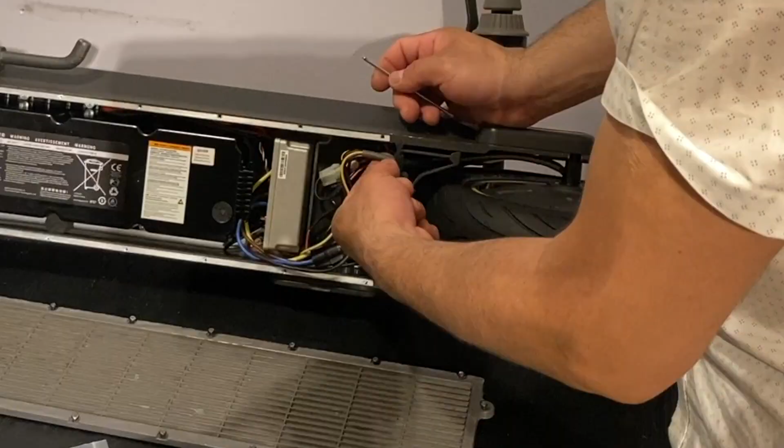So next step, this usually comes tied up. We're not gonna touch anything else, we're not gonna plug anything from here, nothing from here, so we're gonna avoid that step. This is a seal to protect from water coming into the chamber of the battery and the controller and electronics. So what we're gonna do is just push it out, push it in a little bit more, something like that.

Try not to let the wires touch the corners because they're very sharp. I want to make sure it is protected properly, because that could do damages. This is very important for you guys to do it properly. Remember that everything is connected, so you don't want to have any inconveniences due to it.

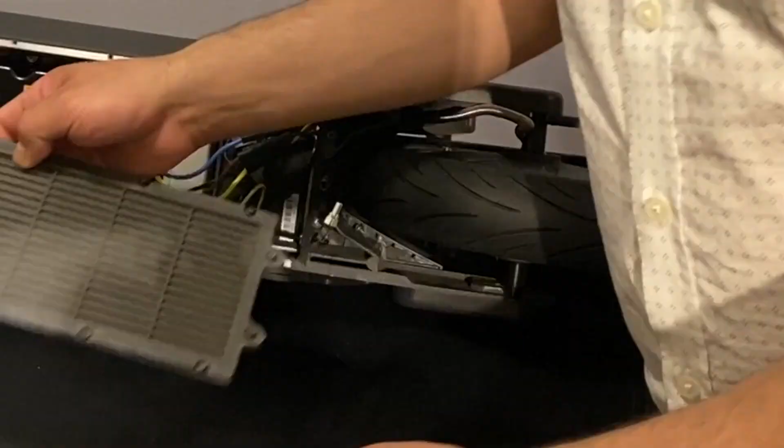So the next step is going to be remove the screws from there, as I was saying earlier. So we need this heat gun over there. Now we have that loose, that's it, so we got this out. What I'm going to do is just put it on the side, right there.

I'm gonna bring the scooter back to position, standing position.

So we're gonna start from the front. We have screw number 1, and number 2 is right there. What we're gonna do is leave it all the way until there. Now we're gonna grab our Allen key that is 2.5 millimeters, and we're gonna start removing those screws out.

We don't want to pull them out fully. Again, if you leave the screws in place, you don't have to worry about mixing them up later on. We're gonna try to keep them inside the same parts that we're gonna remove, because they're gonna have to come back to the same place anyways.

As we can see, the screws are gonna be right there, they're gonna stay right there. So what we do is just gentle, put it like that, and then we can put out the fork aside, and we know that the screws are gonna stay inside, they're not gonna fall off. Start removing.

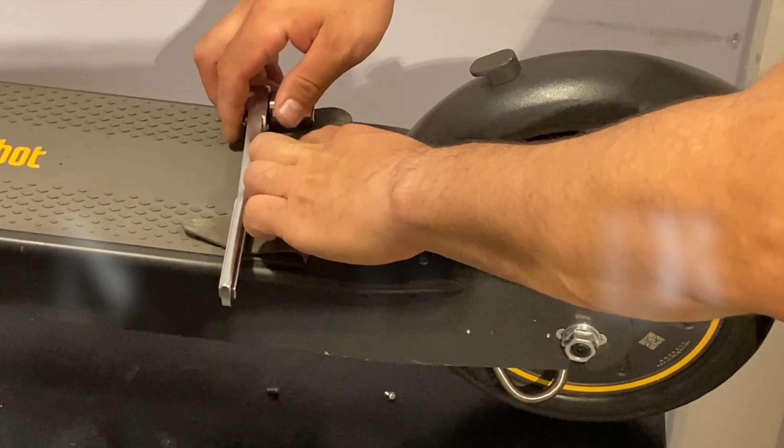Again, to keep the screws in place, use your hair dryer or heat gun just in this area. So this, when you lift it up, becomes clean and it's able to do right there. Now this one will be Torx number 15, the same one that unlocks underneath.

So now, as we can see, we removed those 4 screws. Over here are the ones that they're connected to, 1, 2, 3, and 4, that we removed already from underneath.

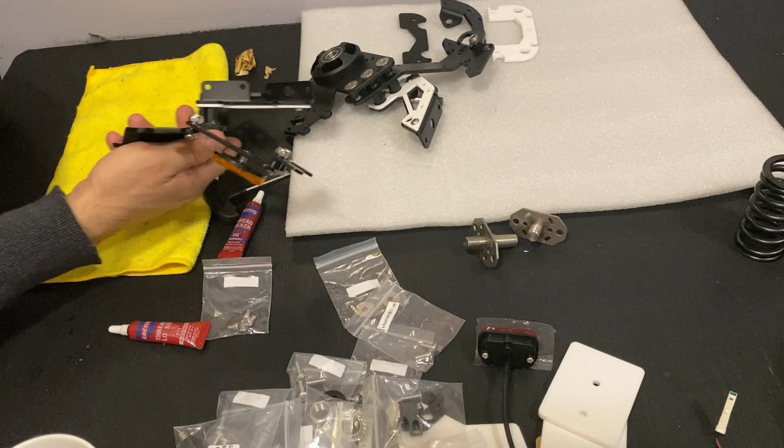Okay, let's begin with this. We're going to proceed to remove the protective shield that is placed for the acrylic. It's like a paper or plastic. So we're going to have to unassemble these parts.

Before you actually start unassembling the parts, it's best for you to take a picture of the part so you actually remember exactly how to put it back after being clean.

Do one part at a time, keep your screws together so it's easy for you to put them back. And remember to use thread locker in your screws that you know you're not going to be removing again. Use blue thread locker in case they need to be removed at some point.

And remember to do one at a time so you don't make a mistake later on, because it's a lot of parts and you might be having a headache trying to put things back together.

Put your screws in and tighten them up fully because these are not going to be removed anymore once you put it back in the part that it needs to be.

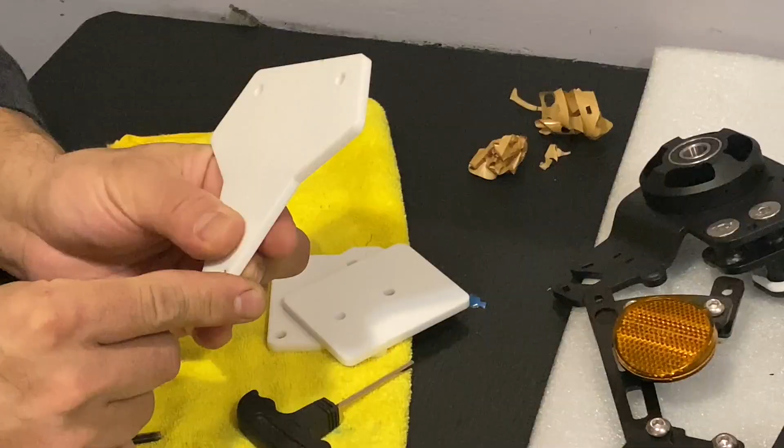Let's continue to remove the protective shield from the acrylic parts. As you can see on the whites, they have that plastic that over time looks damaged, so it's best to remove it at once.

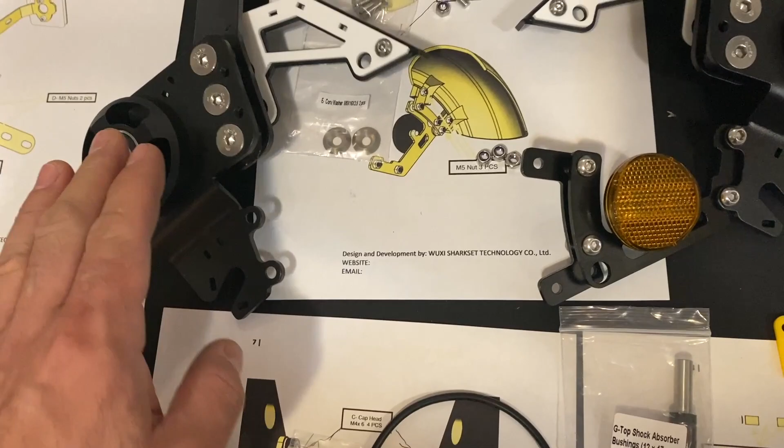Again, so simple: follow the instructions in the manuals, and put your parts separate so it's easier for you to do the installation later on. It's very important to follow what I'm doing, because otherwise you might end up undoing parts, and we don't want that. So we're gonna do it all at once.

Since we're in the process of installing the suspension, I want to show you a couple of things that are key and important to understand. As we know, the Sharkset rear suspension comes with two springs: one for 100 kilograms and less, which comes pre-installed, and another for 100 kilograms and above.

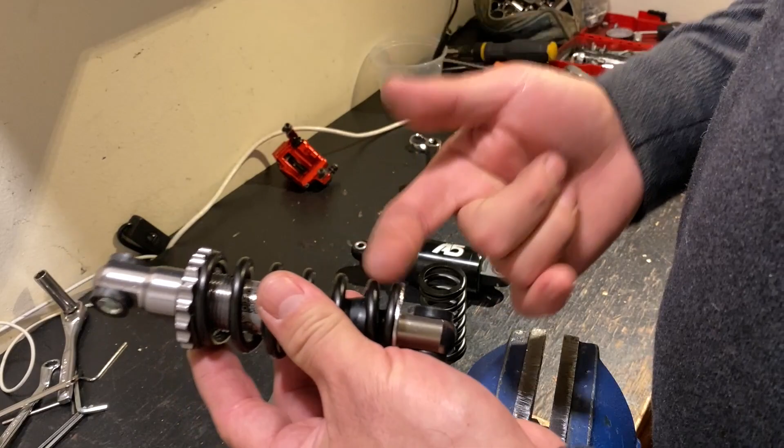There are two ways to change this. I'm going to show you the one I like, because I know from experience that when I remove that screw from here, it always becomes loose, so we don't want to mess with that part. We want to do it the other way, which is simple - all you need is a few screws, some parts like this, and sockets.

Let's begin. As we can see over here, you loosen this completely in case you want to do this part. Push this up, put this rubber up, and then you get to this one.

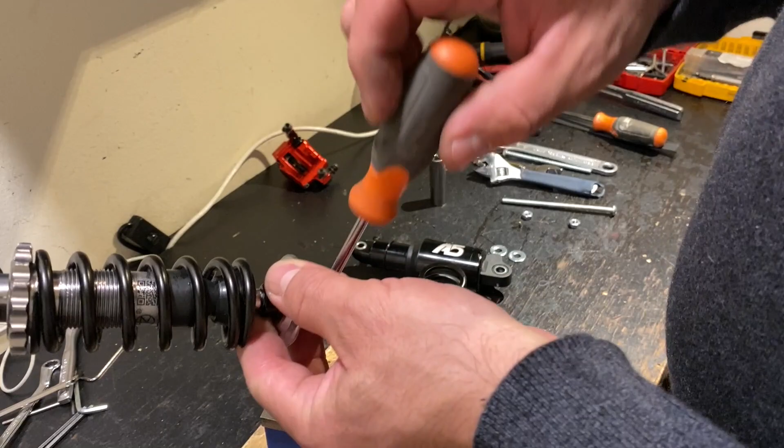The way you'd normally do it is grab a screwdriver, but that's another part I don't like, because once you put the screwdriver here, you put a lot of force on this part, and the cylinder could become bent.

Let's proceed the other way, the way I like to do it. First thing, I'm going to remove the bushings. As we can see, these are very simple to do.

So here we go. As you can see, this thing doesn't come out easily. You don't want to hammer it, and you don't want to put it in the vise, because the jaws of the vise are very rough and that will ruin the cylinder.

So what you're gonna do to start is put in the bigger bolt. I don't have a smaller one on hand, otherwise I would show you how to do it that way.

Look at this, it's very simple. So we have it right there already. Our next step is to hold it on one end right here, so this doesn't turn.

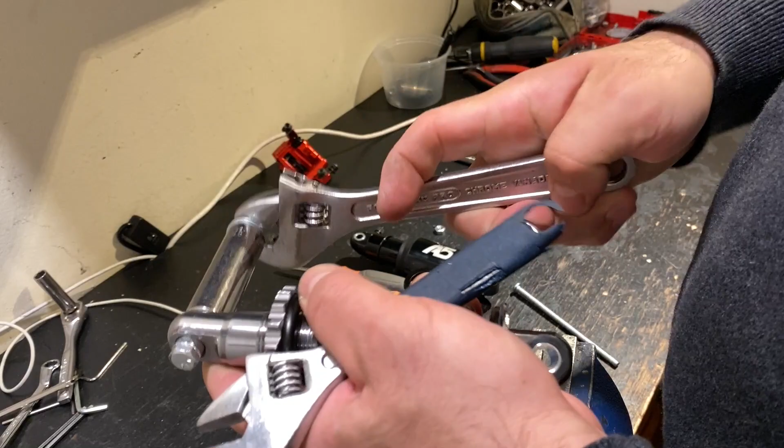Then we go to the other side. Once it's a little tight in there, that thing will not move - see? So all we need to do is just keep turning. You can see I'm at the limit already, so this bolt over here doesn't go in.

So we're gonna use the other bolt. As you can see, it's almost out. So we go back to square one, put that back in, same nut.

So look, once that is tight, it comes out. Can we see? We got it fully out, the cylinder, without having to hammer it or anything. This thing is like nothing happened.

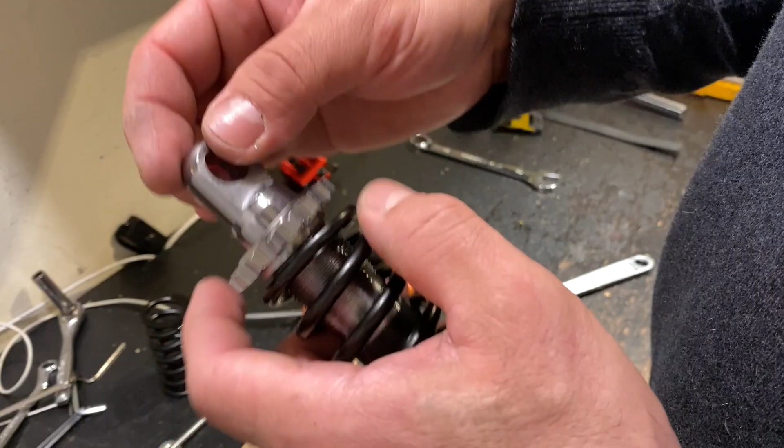So now when you have done that, simply remove completely this part. See, you get out the nut, get the spring out, put the bigger one in. Anyways, I want to keep the same small one. Just remember that this thread over here is the one that is going to go down. Anyhow, so that's the way to remove it.

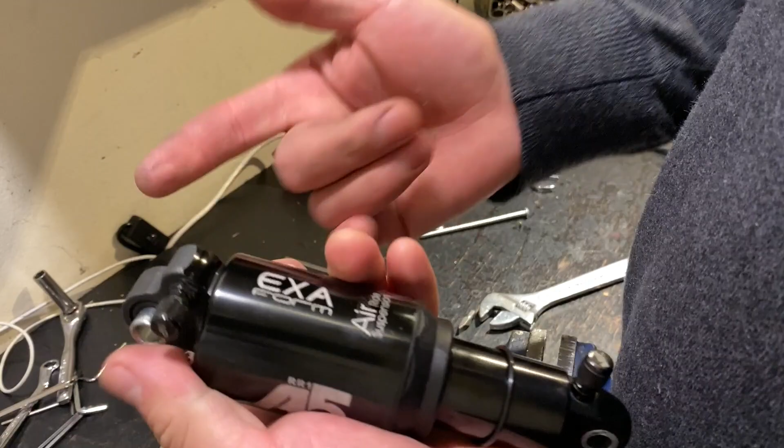Okay, so now I'm going to show you how to remove this one, and this one should be easy to remove. As you can see, you just remove the old one. You're not going to remove the plastic, just this one, and you simply put this one in, the one that it came from there. Put the bushings on the sides like this, put the other one, and then you're ready to replace this one.

So remember, this is 150 millimeters, so you'll be looking to install the same dimensions. It's 150 millimeters from eye to eye. Anyway, so that is done. So that's how you replace the cylinder.

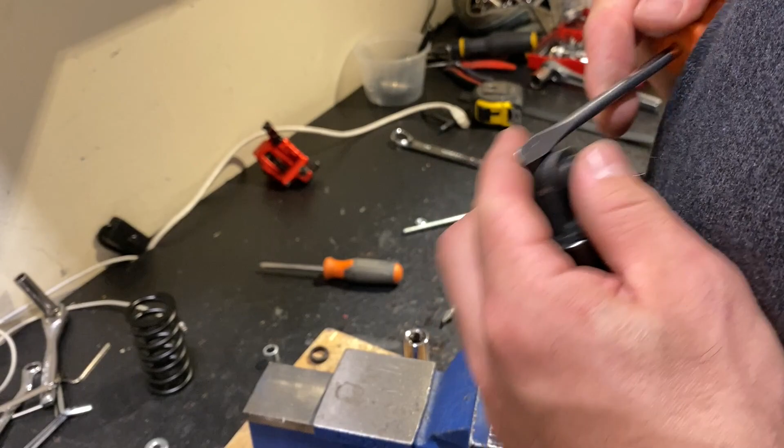If you get air shocks, new ones, then you don't need to do this, because it will fit just perfectly going to this, from this to that one.

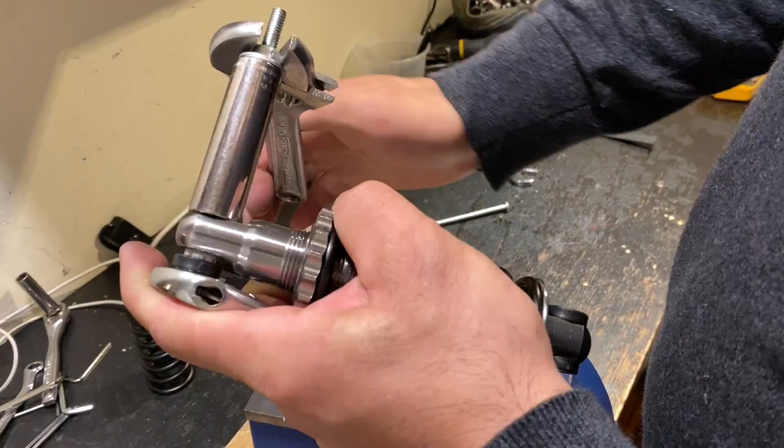All right, so we got the air shock right there out. So let's go back to put this back in. As I was saying, any direction will work. So let's put it this way. Push it on the side, square right there. Go to the other side. Like this, we will hold it like this. And that's it, so as we can see, done.

I need to remove it. Remove the nut. And that's it. Done. So that's how you replace, how to exchange the spring.

And also, if you have done these changes already, and you're going to put the same air shock that you're using for the other suspension, just simply do this process, and that's about it.

I tied up these nuts, so let's continue with the rest. So we're going to the right side, so we're going to start with this.

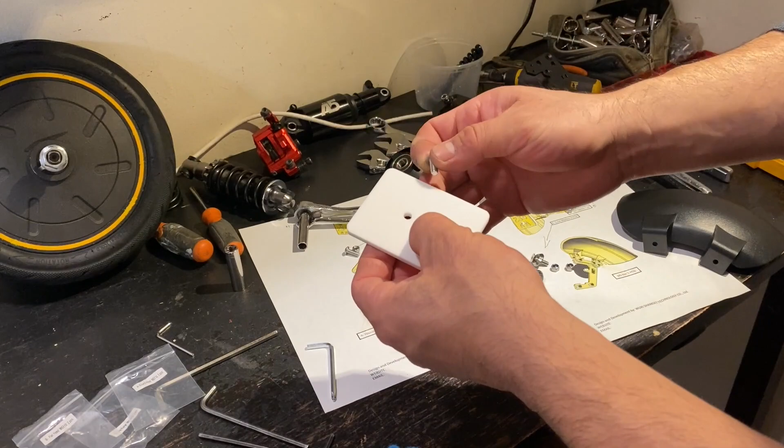Line up the screws with the nuts. Now I have the wrench that comes with the set, but this is a lot of little pieces, so we're going to try to do it as fast as possible. I don't want to spend the whole day or make a couple videos for a single installation. We don't want to do that, so we're going to proceed using the best tools to do it quicker. So here we go. Done.

We don't want to put too much pressure on the acrylic because it might break. Alright, so this part is ready to be installed.

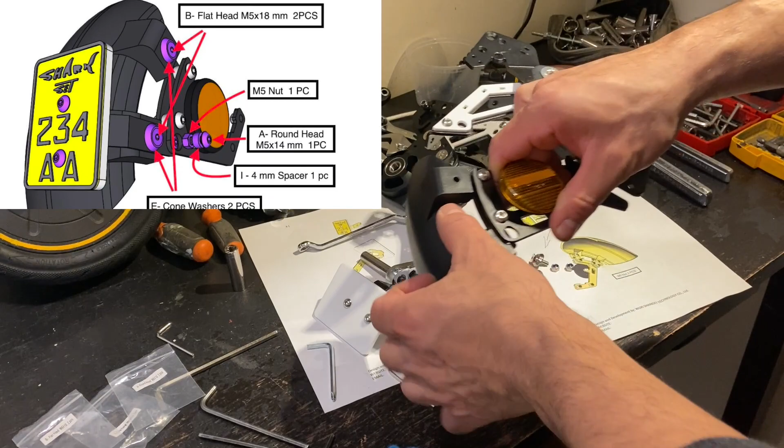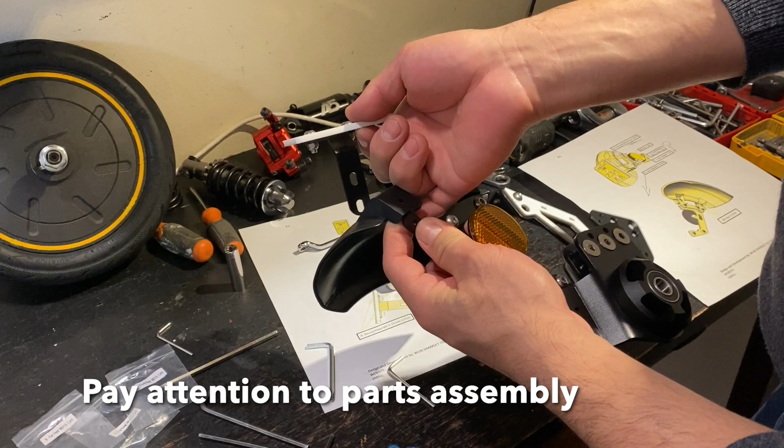So we're going to proceed with this, and it's going to go that way. We're going to start with one first, which is going to be the front. As we can see, this is the front part of the suspension to that side. So we're going to put this one over here first, and put a nut on the other side, like this. So we put this one in, like this. Let's proceed with this one over here.

So we're going to do the nut on the other side. Alright, so I couldn't find anything that actually works, so I'm going to use just a bushing from the ones that are for the suspensions, I mean for the air shocks. Right there. As you can see, it's pretty big. Might possibly do the job.

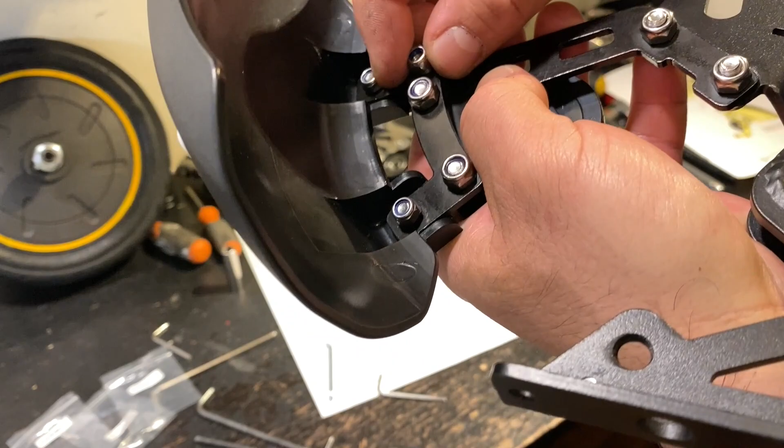Alright, so now let's tie up all the screws. And it worked, look, it did work. Okay, so that's how it goes. Perfect, so now we have the guard perfectly installed, so let's proceed with the next part.

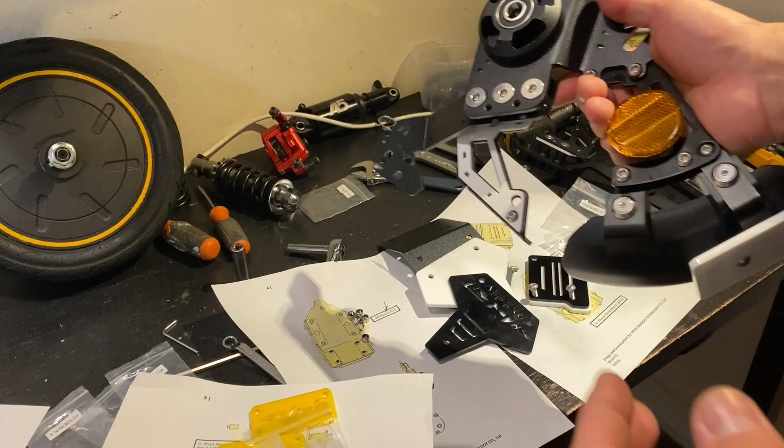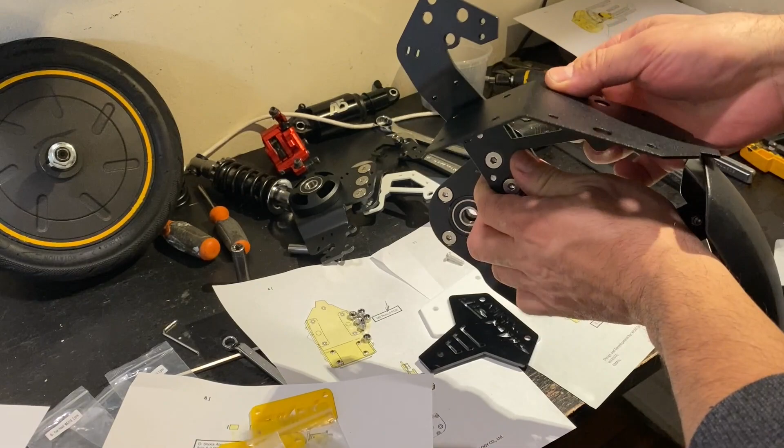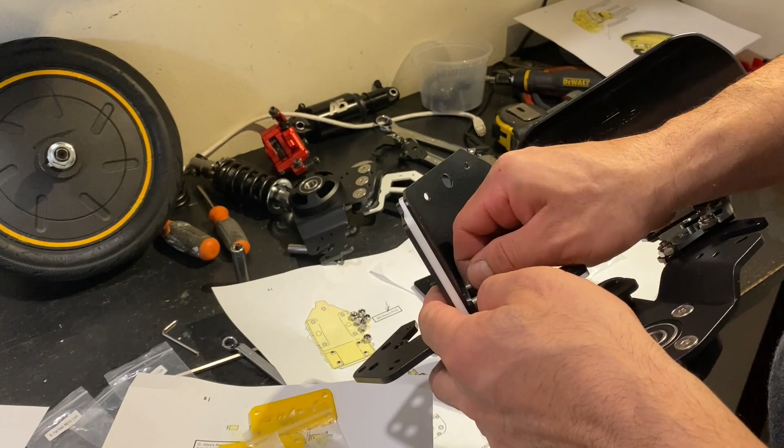Alright, so we're going to use the nuts at once. This doesn't need any thread locker because the nuts are nylon head. So let's hold this thing up from here. The key.

Then another one. Let's leave them a little loose because you cannot actually tie them up, otherwise it will not fit in the other side. So this one is to go this way, just like this.

Remember, we are using 18 millimeter M5 over here, and it's going to be only one actually. Be patient, you will make it work. Be patient.

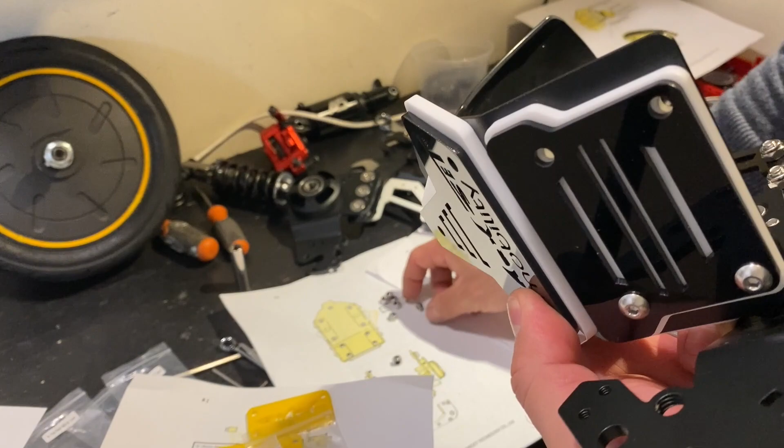Again, this is attaching the 3 parts together. We have the black acrylic, the white acrylic, and the base. On top of this, and the very bottom is the base of the arm of the suspension. So you want to understand that 1, 2, 3 parts plus the base of the suspension.

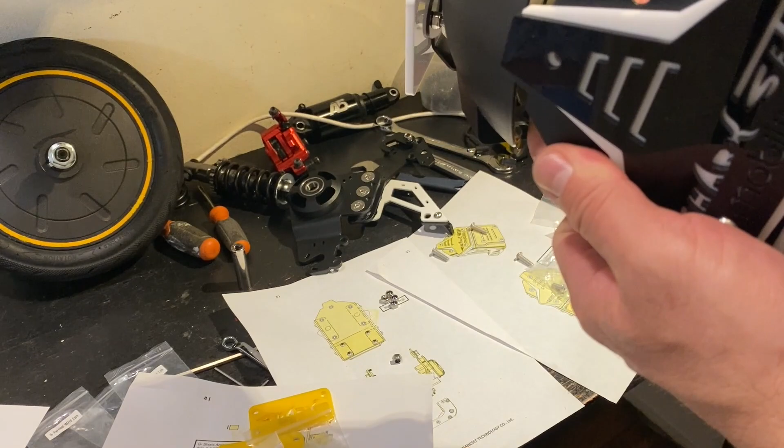Okay, so we got that ready. As we're working on the one side, we're gonna do this one first, which is 12 millimeters. This one is 12 millimeters. Okay, that one is there. And this one is going to be 16 millimeters. It's going to be that single one, on the top. That one we can put it at once. Not underneath.

It's looking nice. We have the first part already done. We're gonna do the decorations on the right side. We're not gonna put them all the way through until we have all the screws lined up.

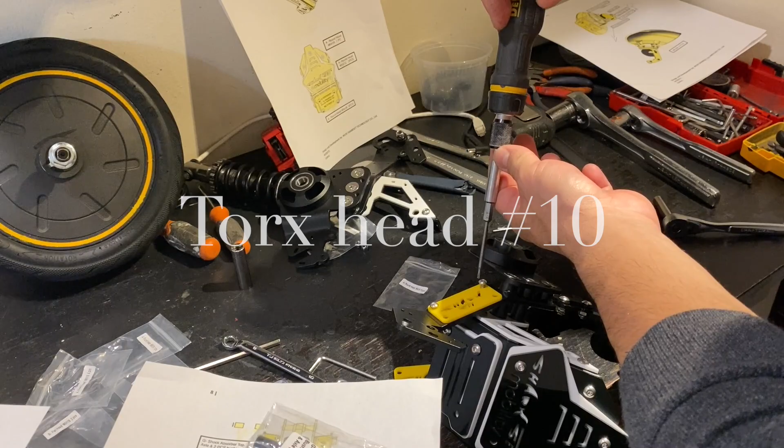Again, we're gonna have to get something that really works. This is... alright, so that is done.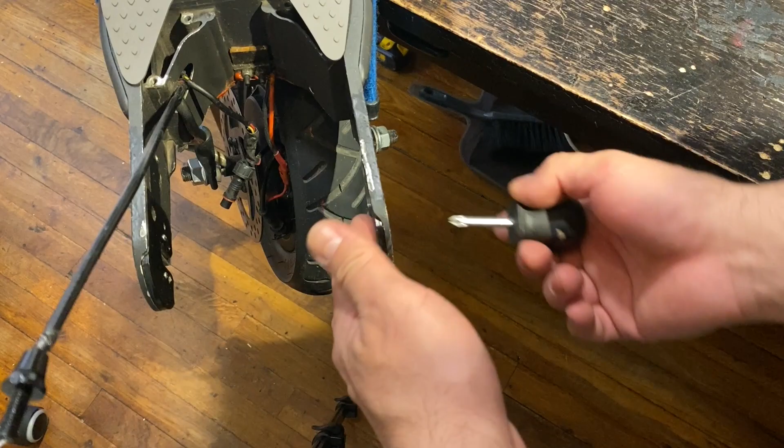Remove this screw from here for proceeding. And this is a torque support.

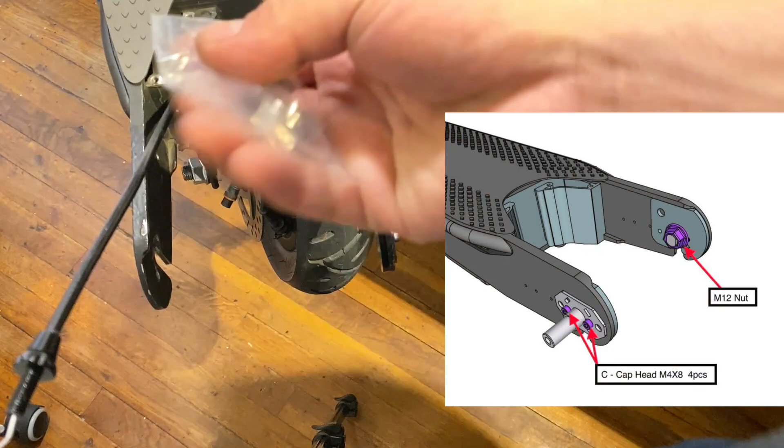So now we are going to use this nut. I'm going to use some thread locker. Believe me, the vibration in this part of the suspension is heavy, especially if you have a bad tire like the one I'm using right now. Alright, so I'm going to make sure this is aligned properly.

Alright, so now we're going to put pressure. Tighten up the nuts fully now. Okay.

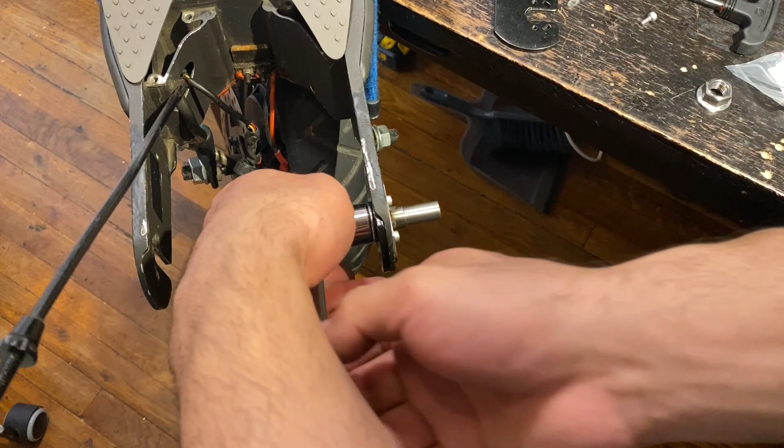As you can see, whenever you're doing pressure, you don't do solid pressure to it, you go this way. Shake it until you get to the max that that thing can hold.

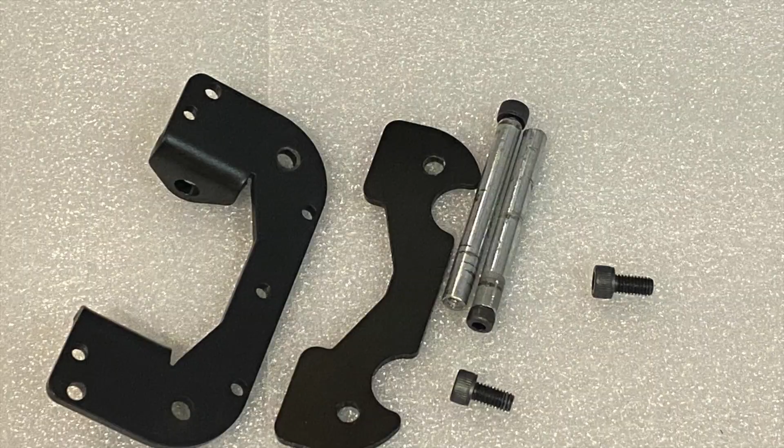Alright, so that is done. Note that this support was created for those scooters that are actually damaged from screws or broken or something like that. So this support will help to hold up the weight in the pressure from the shock on the top of the scooter. In other words, this support is actually not needed if all the screws are good in the top part of the frame of the scooter.

But if you want, you can actually install it, it's your choice. To put this part over here, this part, it goes under here, and this is a great support. I already tested it. I made the parts myself to attach it, because it doesn't bring the screws for it. So that's what I did. I really made two actually, one screw from underneath and one on the other one.

So this is the middle. This one I just made from scrap metal that I have. So I put 2 M6 12 millimeter length. So this is gonna be, I mean, just a little shorter than this part over here. So when this gets together over here, it's gonna clamp and it's gonna make it really secure.

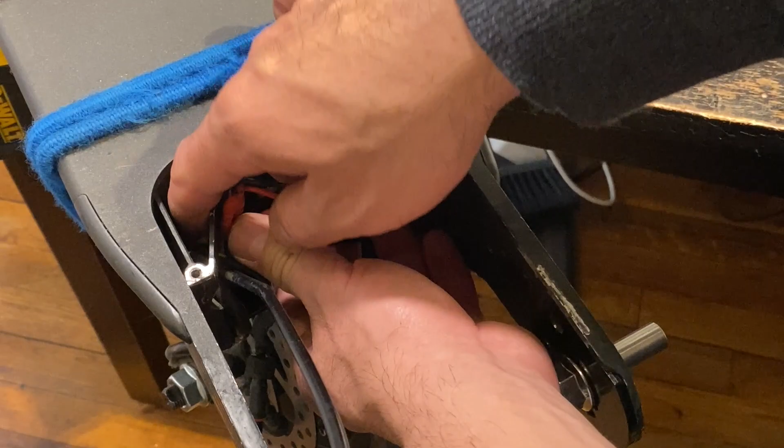As you can see, the wires that I have already here, so the wires for the light are gonna come up over here. So you're gonna have to find a way to secure the wire. Maybe attach it somewhere right here somehow, so this thing doesn't get loose. And another possibility is to find out exactly the length that you're going to be using, and then put the rest of the wire inside the scooter instead.

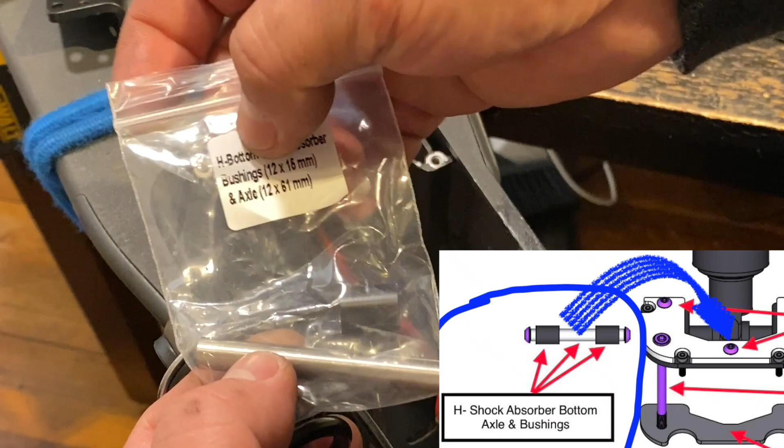This is the bottom part of the shock. So this is going to go this way. And it tells us that we need to use the H bottom shock absorber bushing, which is this one right here. So just read the label and follow what I'm going to do right now.

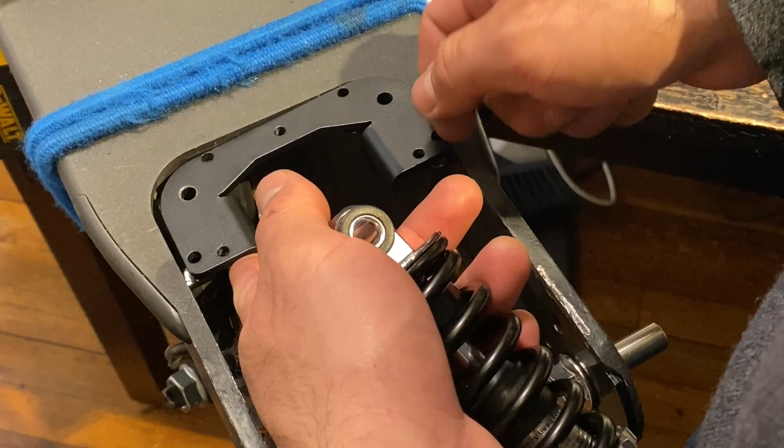You're going to use M6 screws for this part of it. And this has to be done before, because of the way the screws are attached over here. In the future, if you need to change the absorber, you're going to have to undo the whole part. You're not going to be able to remove this absorber without having to remove this whole part, okay?

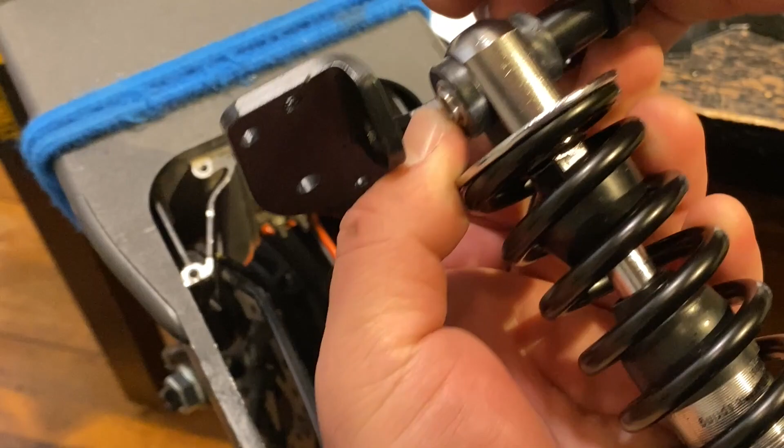So the way this is going to work is you're going to put it this way, like this. Bring it like this, put your shock in, keep pushing. Like this. And then put the other bushing on the other side, like this. So this is supposedly perfect, and it has a slash on both sides.

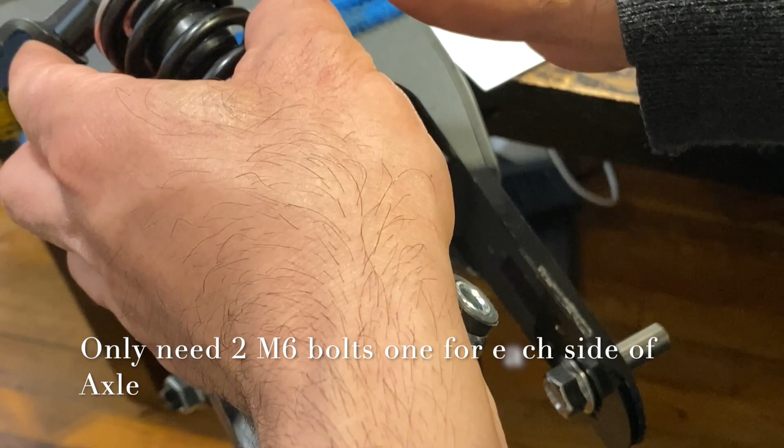So now what we're going to do is use the F bolt. It says M6 by 12, and it says 6 pieces, so it's 6 pieces, but because of different parts of it, all right, so we got this one here. Just look at it, it's already treated with a blue thread lacquer.

He only provides one of these keys, so we're gonna have to get another one, because this is needed too. Luckily I have some of his Allen keys that he sent in previous kits. So we have the shock already there in position.

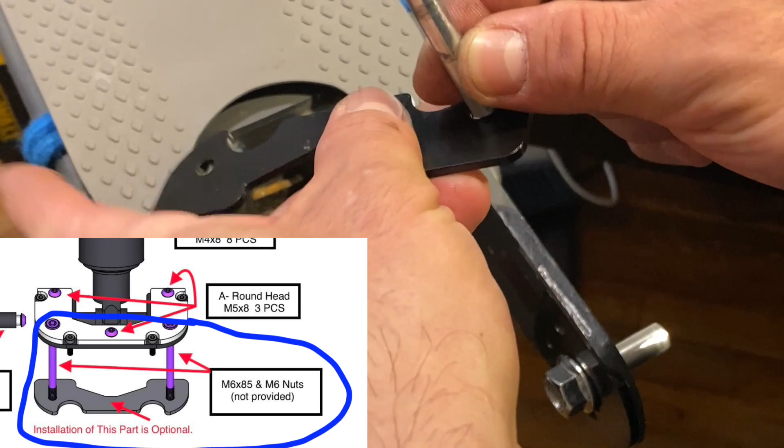So we're now ready to begin the installation of this part. That's gonna go that way, like this, underneath. I'm gonna use the blue thread lacquer.

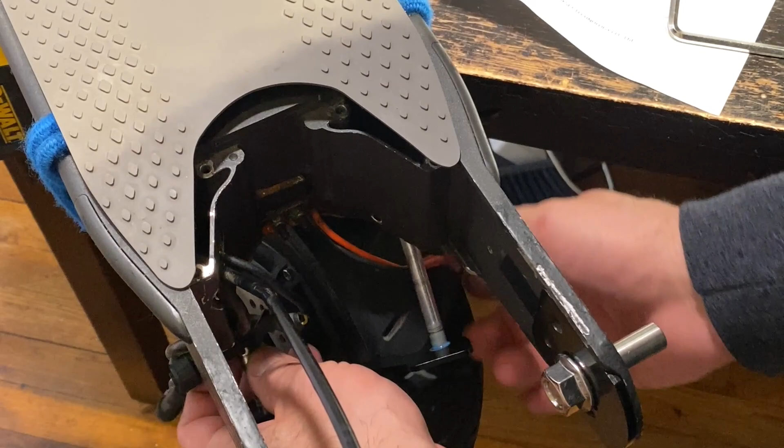All right, so that's it. Now let's see if this is gonna be in that position. Okay, yeah. All right.

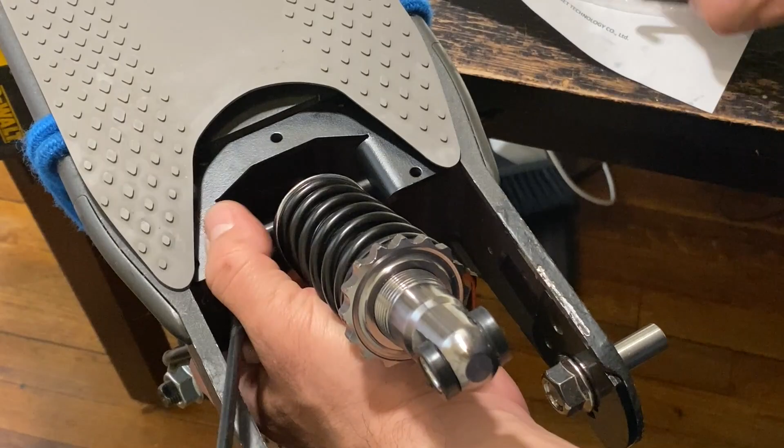Let me get the screws for this part. So what's gonna happen here is I got 16 millimeter M4s. It's very important to upgrade the bolts whenever you're doing changes like this one, because it's not gonna be a mud guard held over here anymore, it's gonna be your body, all your weight. It's gonna be held right here, this absorber pushing a lot of pressure to it. So you wanna make sure these bolts are good. So I'm gonna do 16 in the front and 16 in the back, 16 millimeters.

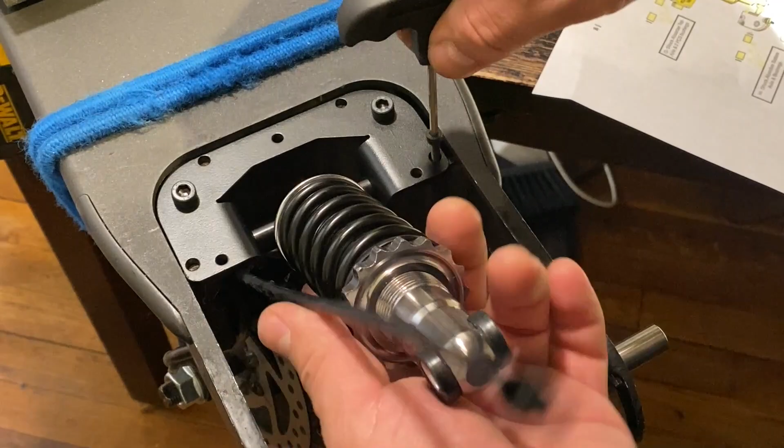I will not do any thread lacquer right now, but you should do the thread lacquer. Once you feel that the key doesn't want to go in, don't push it, because it might damage it.

So now I'm ready to do this part. This part, the one I'm doing right now, I put so much pressure to it. Like, today when I tested, this thing was so tight just with these two bolts. You can see it looks a little bit deep already from that part, just from the pressure that I put on. So if you can install this part, do it, and do it the way I did.

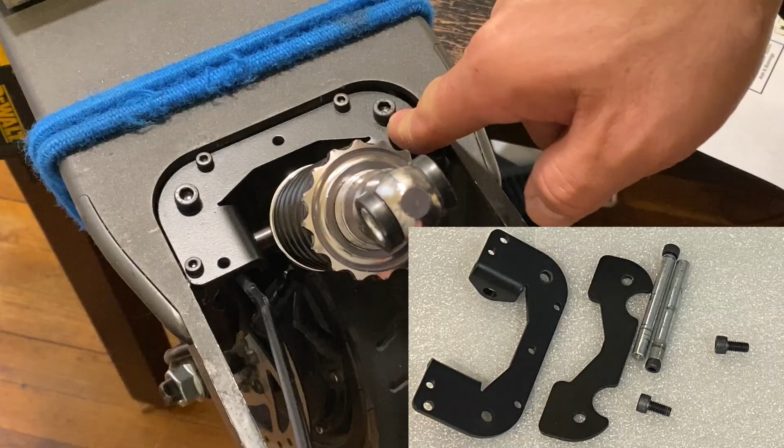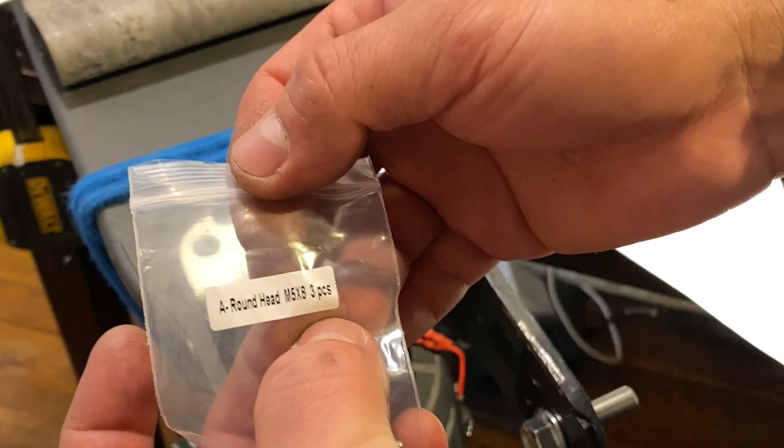This one right there. So what screws does it need? It needs two M6 85 millimeters, 3 screws over here round is the letter A, round head, M5 by 8, 3 pieces. I'm going to be leaving this part, installing this tube, leaving this one alone, but you guys should do all 3 of them. That's it.

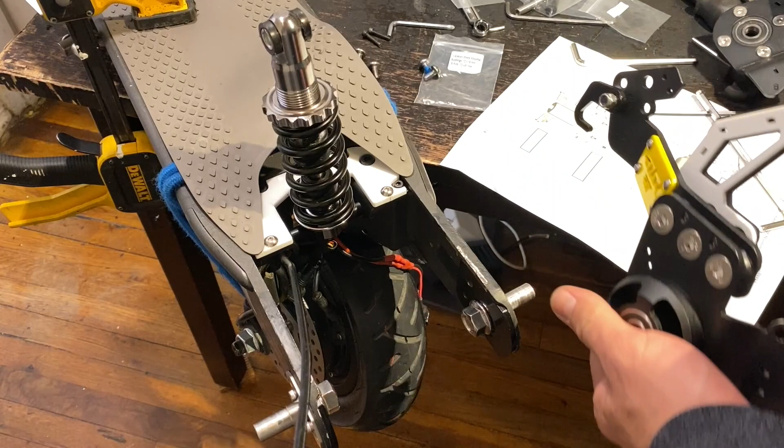Alright, so the moment you guys have been waiting for is here already. As we know, this part's already ready to go, they're already set, and we have the right side, so we're good to go. So what I want to explain over here is that between the two bearings there is a bushing in the middle. You can see right there, that is the issue right there.

So we push it up. If you find yourself that the swinging arm doesn't actually want to go in, don't hammer it, don't put any pressure to it, because what is not letting it go all the way through is that bushing in there.

As you can see, it's a spacer between the two bearings, so just pay attention to that part. All right, so the next thing is when you're doing this type of installation...

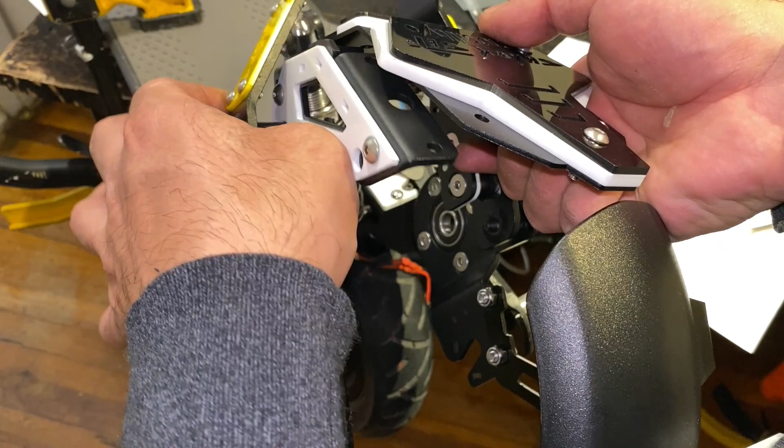You want to make sure the parts are already set. So you put this part over here, and then when you put the second one, you want to make sure these things are almost in the position they need to be. If we put this one like this, it stays over here, and then once you try to put it in, it will not work, because all the space it has to move is just about that part. Let's try to do it so you guys can understand better.

Don't get frustrated because it will work. See that? You don't need to do too much more than make sure it's in position. So we put this one to the front. Now when we put this one up, we make sure it's almost in the same place. As we can see, that's the gap, that's what I'm talking about. So now we have this one line, see, it's already in, and that's it.

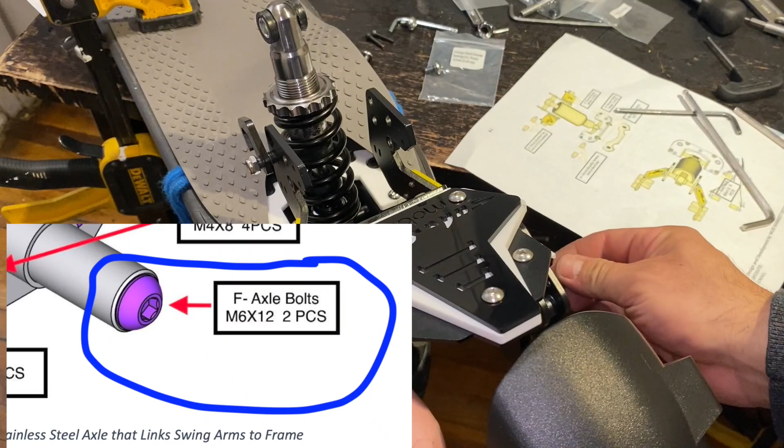So now we're ready to put the screws over here, but first we are going to put the size. As we can see, the screws are already threaded with thread locker, so you don't need to put anything more than tie them up.

This one can get a little bit of pressure actually. So when you put pressure to this type of bolts, what you do is like this. Don't do it at once because they might get damaged.

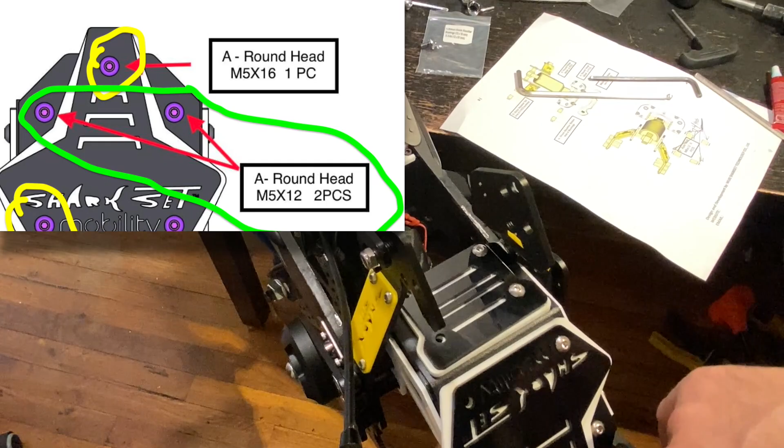And that's it. All right, so the longer bolts are going to be these three in line, and smaller on the side. So I get one over there. Second here. Third one here.

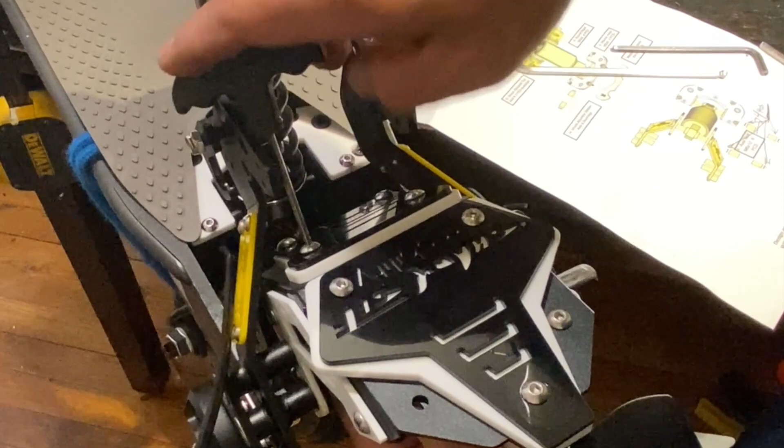Don't put too much pressure, remember it's acrylic plastic on the top, so... right. Tighten this one too. Now this one I really can get a lot of pressure because it's metal against metal.

Oh, I like this. It's very smooth.

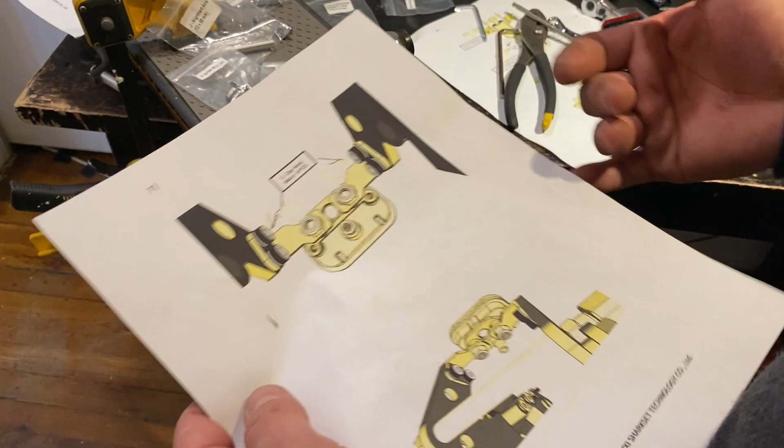As I see it, as I was looking at the pictures, as we can see here in the light installation, I can tell right here that everything else is actually done after. As you can see, this hole is still empty, so this picture was taken before putting the light on. So let's begin with that first.

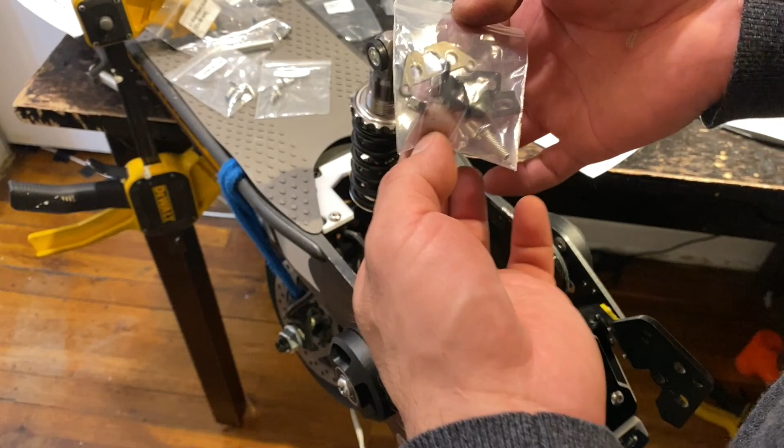See, there is not even a label about it, so it doesn't say nothing more than the C cup head M4, 4 pieces, and I believe those are the ones that are going to be attaching the parts and the size.

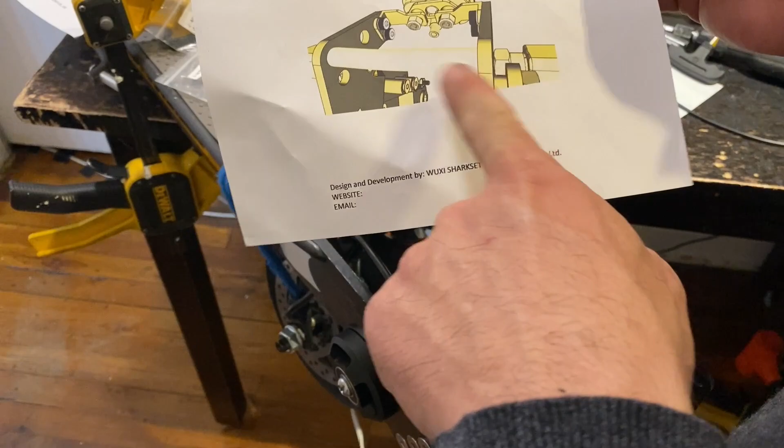So let's see, I'm going to start with that part first. I'm not going to speak, it requires a lot of concentration actually the way the parts are in place. You can see there is no axle in it. So yeah, this is the plate that goes first, and then we proceed with the rest of the parts attachments.

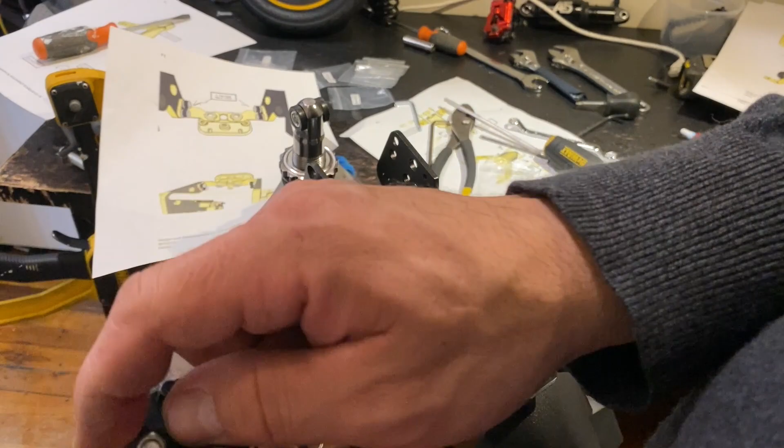All right, now that this is like this, as you can see, I'm going to put it at position, so we can put the screws on. So this is going to go like this. Alright. Perfect, let's eliminate that.

Okay, so now we need the 4 screws. First we're going to do the bottom nut, the bottom screw.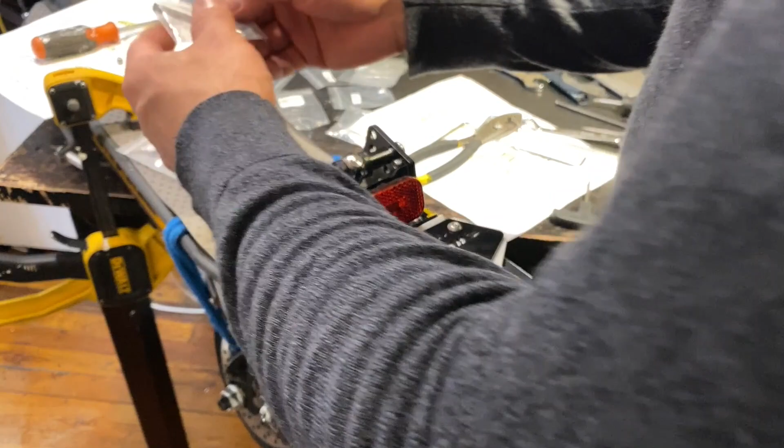Alright, we're gonna leave it like that because we need to put the next one, which is the front, and it says it is J alignment axle. As per I remember, it's gonna go with these two B flat head M5 by 18 pieces.

Alright, so this is gonna go right there, like this, as you can see, in the front. Okay, this from this side. Alright.

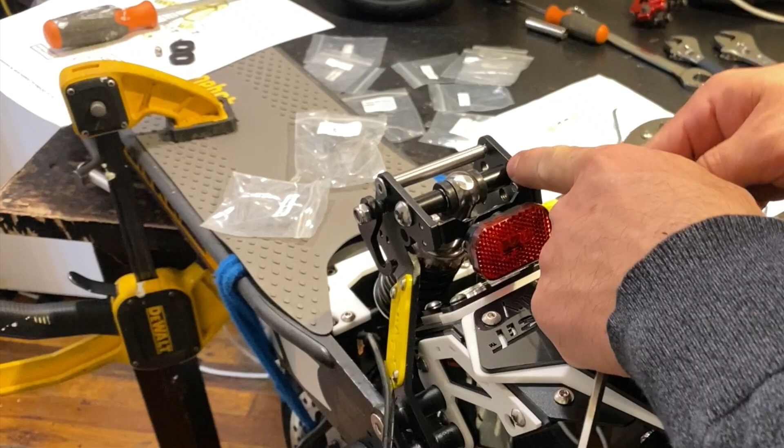You see, if we have a little space like this, we have that little space like I showed over here. It's because one of the sides is not properly aligned, so that's what I just did, align it. Now let's see if it goes through. Okay, that is done.

Okay, suspension is installed.

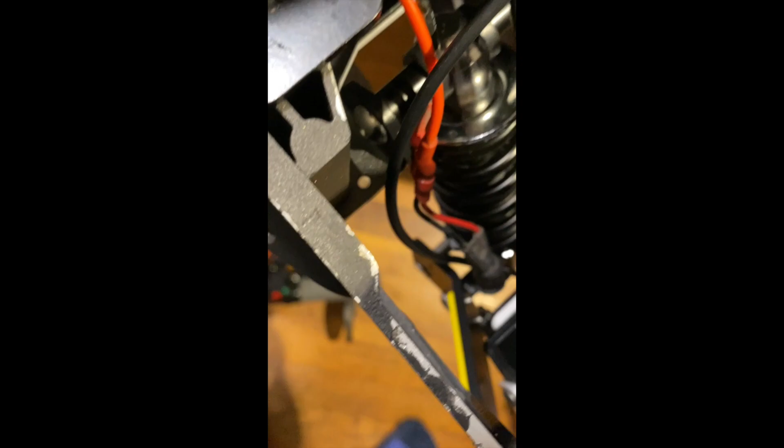Okay, for the light, you guys gonna have to not get the wire near here, because this is an absorber, so all those springs come out like this. If the wire gets in, it'll get caught. So the best way is to get it to the side, and then as we can see, the wires I have here, those run over here and then enter through the hole for the light.

So that's going to be your entrance right there, doing the connection actually on the inside of the scooter, not leaving any connection outside, because this one is more exposed than regular connections. So to prevent the light from getting damaged, it's going to have to be done that way. Before you put this part, you're going to run your wire over there, get it in, through inside the scooter.

Alright guys, so we're gonna do two installations. I have the Fat Max, which is actually the one that is for the scooter, but unfortunately I just tested and this disc touches over here. I could grind it, cut a little bit off the nut, but that would not be the ideal thing.

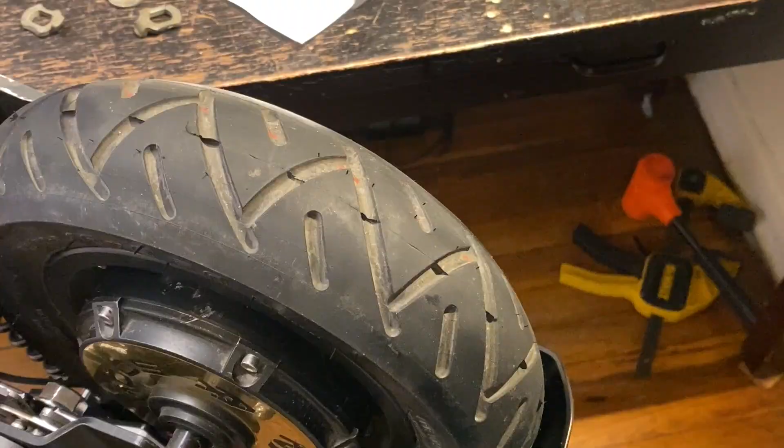Okay, so Fat Max, actually it is 2 inches 55 millimeters, so it's 2 inches and a half, Fat Max. And then versus the standard G30, which is 2 inches 30, so about 2 inches and a quarter, a little more than a quarter. No chance for the Fat Max, the big tire, to fit right here, unfortunately.

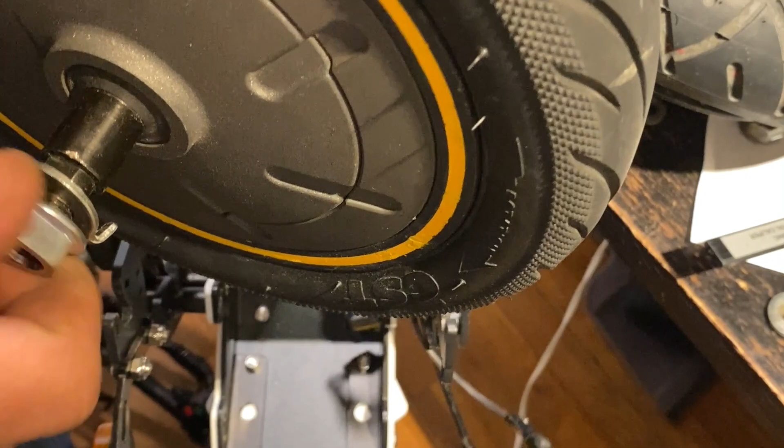Alright guys, so we're gonna do the installation of this. So we get over to the installation part. As explained over here, we're gonna start by doing the G30, the standard motor, as explained in the installation book. But this needs to go first, in right there.

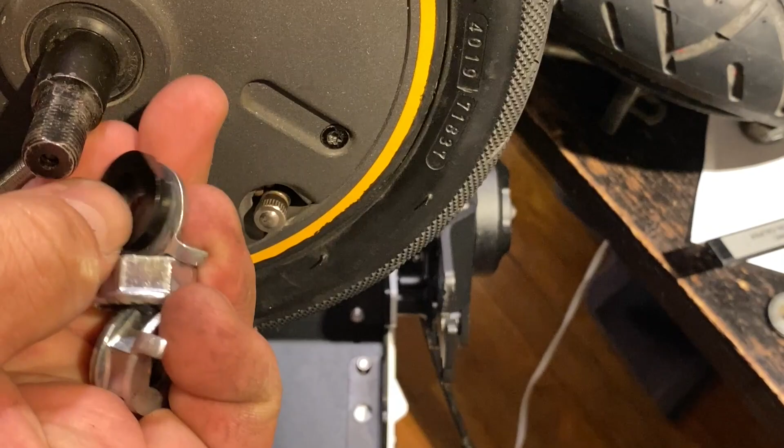Okay, for this, right. And the other side we're gonna do the same, we're gonna put the spacers. They fit perfectly great. Alright, just make sure that your wire is in position as you want it. Yep, that's how it goes.

And then simply, what you're gonna do is put your top nut there, then you put the other one on the other side. Like this. Put one nut. Second nut. And tighten it.

And that's it, that's the installation for the standard motor for the scooter. All you need to do is put the spacer inside the suspension swing arm and the other side too, and then just put the torque washer and then put your regular nut, and that'll be all. That will be the installation for this one.